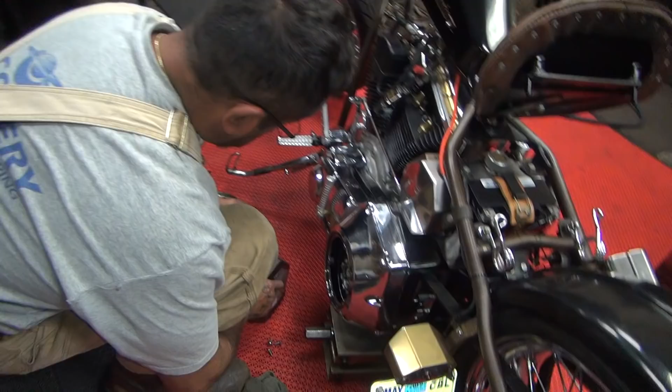Now we're getting some Sportster transmission oil. This is Sportster primary oil, same container, different label. I got an extra quart of that, so we'll get rid of that first. Need to lean the bike over a little bit, or are you good?

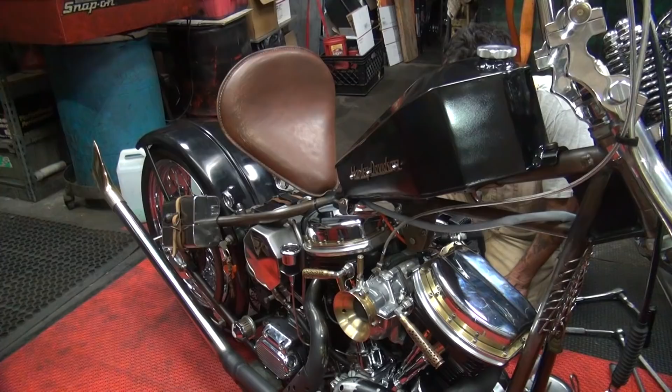Yeah, I had to put that turret tailstock on my dad's old lathe, man. That thing works great. Center drill. You didn't have a tailstock on your lathe? What good is a lathe without a tailstock? Oh, with a turret though, on the back of it. Yeah, I had a turret tailstock, it was all rusted. That's pretty fancy, saved a lot of time. That's fancy having a turret on the back of your lathe. Hey man, it's a good lathe. Thank God my dad took care of it. It made my life a lot easier right now.

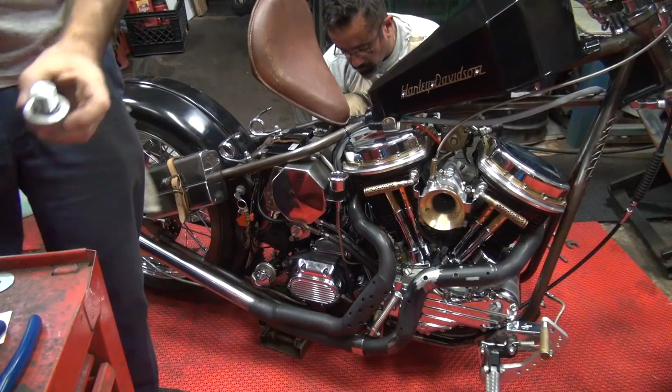So what's going on? Oil lines are probably correct. So I assume the outside oil line here is your feed line? Yes, that steel is the breather, inner one is the return. So you return it into the bottom of the tank? Nope, it's got a hard line that comes all the way over here and drops. If you remember when I made that, I asked you how to make it. Well, I thought we made sure it was correct. Just double check, it looks like it, but it's not. There's a line that goes up and drops back over here. So, oil leakage around your feed line around here, but that's probably just residue. Okay, yeah, it looks like everything's correct, if I can tell.

Should go out pretty quickly. How much have you spun the motor over so far? I probably turned it on for 4 seconds. Okay, well it takes a little bit longer than 4 seconds most of the time. If you pre-lube it, pre-prime it, it goes a little quicker, but that's about it. So we got an oil gauge right here, and we got an idiot light right here. Either one of those two should go out. Okay, we're in neutral? Spark plugs out.

We are in neutral? Yes. Spark plugs are laying against the ground where you can see them? They're up on the top motor mount, yes sir. Okay, give me about a 5 or 10 second blast and see what we get, make sure the spark plugs are working.

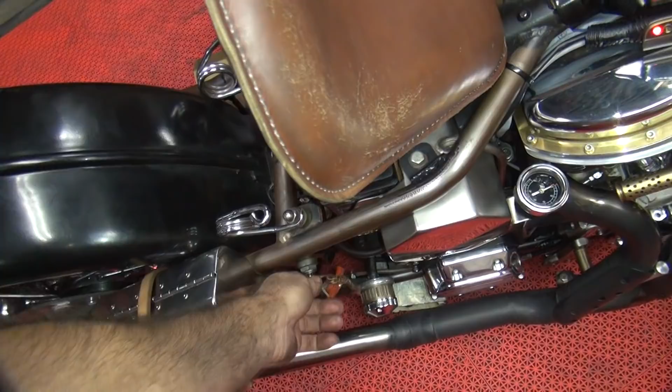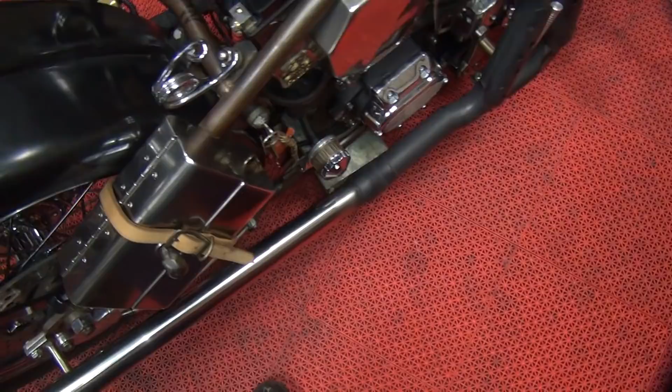Your relay is not working. Did we hook the wire onto the starter? No, we didn't, it won't work without that. Spade terminal, dumbass. Well, he's a dumbass to put the starter in there.

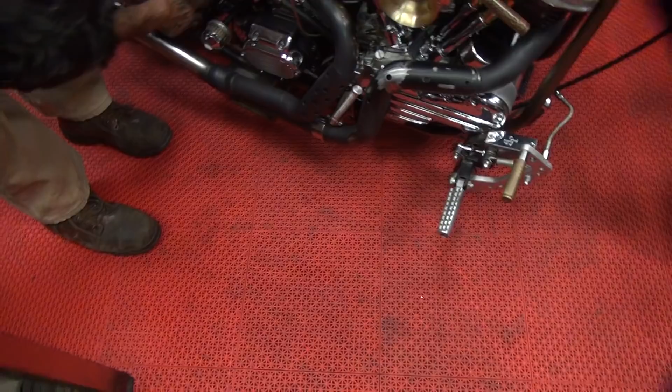There, we got it worked in now. Might work now? That's what they say. Well, it's hard to get good help, you know.

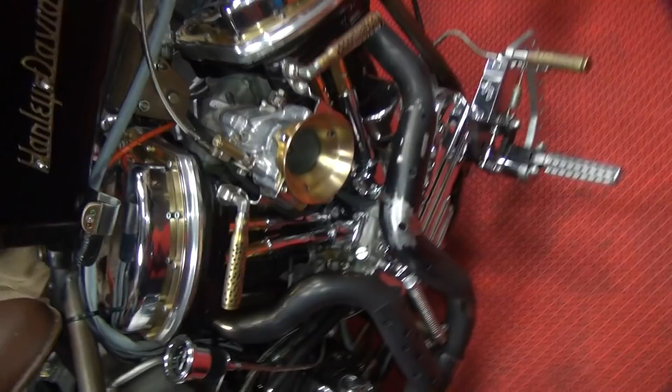I checked the gas, the carburetor, it's not flowing, it was stuck. It's stuck, it's not pouring the gas out. I don't know where the overflow's at. It's back here. It's not coming out yet. But, oh, you're all right. Gas is off, isn't it? Leave the gas off, I don't want any gas off in the carburetor.

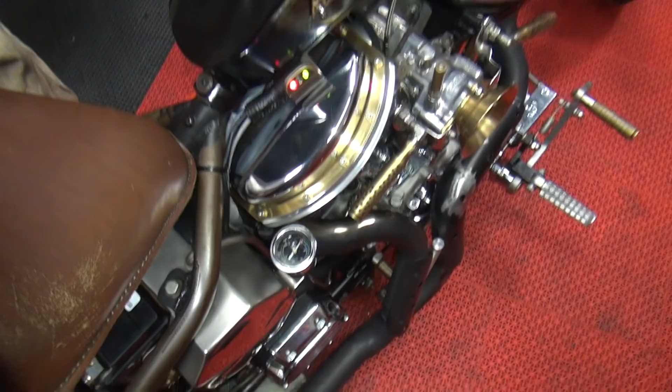Okay, so we're gonna see if we got any oil pressure. You go check the ignition to see if it has any ignition. Ready? Yeah. Still not working. At least the starter's working now. Trying to start, let me get my jumper.

Okay, we're gonna bypass the... you're reading from the positive to the starter, right? I'm just gonna... flashlight's up over there.

It's insulated, so I can't use that.

What was that? Where'd that spark come from? Okay, we got it dead. That's sucking a hell of a lot of juice and not doing anything.

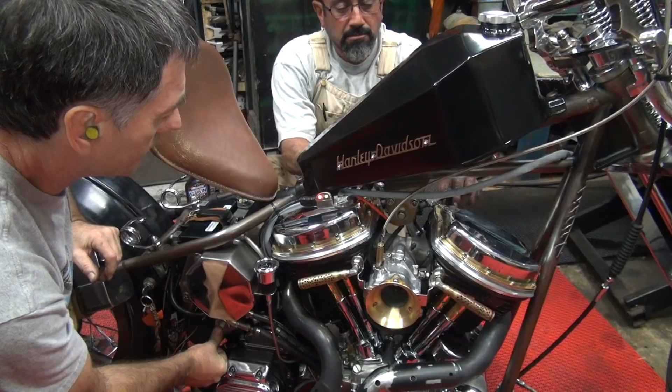Yeah, you got a spark. I can see one sparking. Is there a good spark? See the rear one? I see something flash over here. Can you tell if it's pulsing back and forth? Yeah, they are. They're pulsing. But we have no oil pressure.

Nothing. Alright. We need oil pressure, we don't have it.

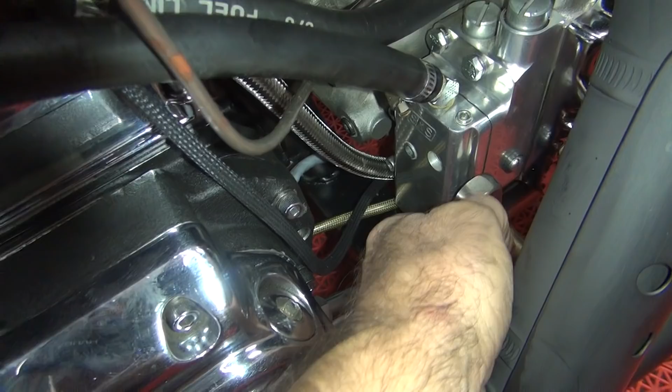See this oil line right here, there's a gallery that goes all the way from top to bottom on S&S, I think. So it's just going. This is on the same feed, feed and return on the same thing. It should still get oil pressure, just it would build up in the motor, it wouldn't pump back. Because that should be over here.

No, hold it, where's your feed at? Yeah, your feed's coming on top. You should still have oil pressure even if it was hooked up wrong.

So I'm not sure, I have to look in the S&S book to see how this is supposed to be. I think it's supposed to be over here. Is there another fitting next to this one on this side? There's a plug for another. That's where it was before. Yeah, it should be over here. You're on the feed, this is return. So you got return in the feed. So that bottom fitting needs to go over.

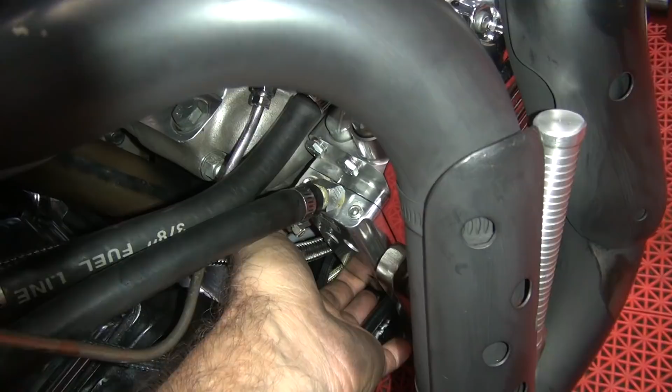It's leaking too, a little bit. So you need to reverse that.

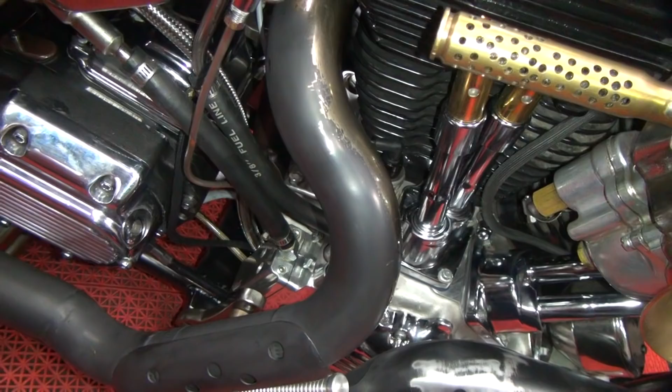Alright, but I don't know why you don't have oil pressure right now, because you should have a lot of, the oil should be going right into the motor and have pressure. It just won't pump back. You should still have oil pressure. You'd have wet sump real bad, but you would have oil pressure.

Now, how much has this oil tank gone down, you think, from where you've had it? It's pretty far down, yeah, it went down quite a bit. It went down a lot. Well, if it's gone down, that means there's oil going in the motor. It should have oil pressure. I don't understand why there's no oil pressure.

Did the dummy light ever turn off? No. What's the tank at right now? It's about 1.25 inches down at least before. How far is it down now? It's probably a third of a tank down. Is it down to half a tank yet or not? Shit, it's down a couple inches now. Yeah, it was down pretty deep before.

So it acts like you got volume going through it, but it's not building pressure because it's venting right out the tank. It's not a closed system right now. It's open. I mean, but it should still build up pressure.

I think it would still build pressure because you're still going to the feed gallery. The pressure's on the other side of the pump gear, so you're just double feeding it basically, but you're not double feeding it because there's no oil to the other line. You know, because the tank's low, it blows up top of the tank. It should still be making oil pressure, still. It would wet sump, run the tank dry, but it would still make oil pressure.

Changing that feed, that means you got to pull the exhaust off, I assume? No, I could probably get to it if I had a stubby. Yeah, it's going to be a pain in the ass doing. You should do it on your lift at home, be easier, but otherwise we're going to have to lean the bike over a little bit.

How strong are these bars? Can we lean them against the rack at about a 45-degree angle to get access to the motor, or? No, I ain't gonna do that. I could get to it. You got a little short Allen wrench? You have to make one. Just make one, cut it, whatever it takes.

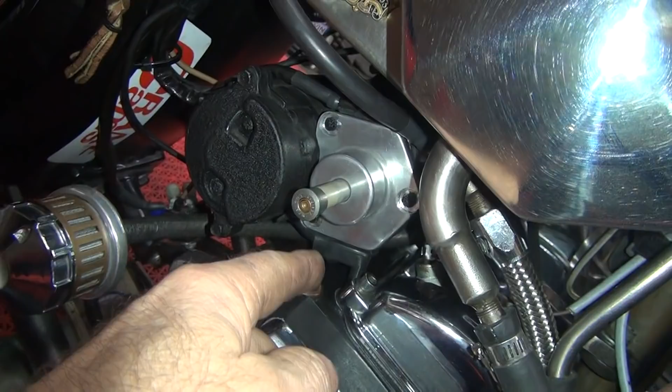Where's your wire going on that? The big cable, it's down. Can't see, yours is going to the bottom? It's not to the top? No, it's on the top, positive, yes that's what I mean. It's up, this is side post. Side goes forward, back, and the top goes back.

You have a side post starter. Now, you got room to do the top? You probably have room to go the other way, maybe. I don't know, it'll be real close to your oil tank up there. Why would that do that right now? Well, I think it's something inside the solenoid doing it. I don't know, there's something that's causing a hell of a load.

Usually when you take stuff apart, you see problems. You can guess all day, but take it apart and look for something. Okay, I'm gonna go look at the instructions on the oil pump routing. I'll go grab my old instruction paper. And either way, you got to pull that line up, I'm pretty sure. So we'll be back.

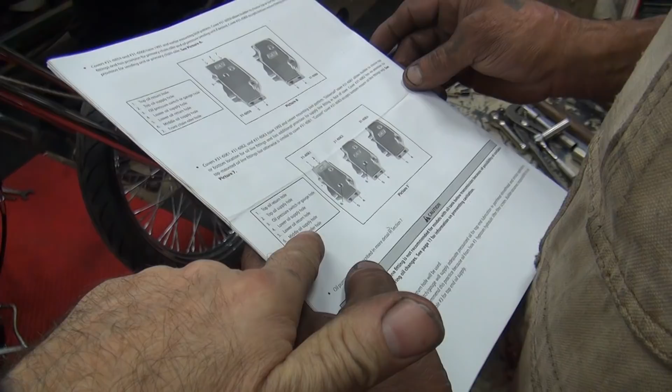What are you looking at? Is this which oil pump? That's for an idiot light. Middle oil supply hole. Oh, that's for like an FXR where they come in through the top, through this, at an angle, 45 degree. So which is my oil pump I'm looking at? It doesn't matter, the covers are all the same.

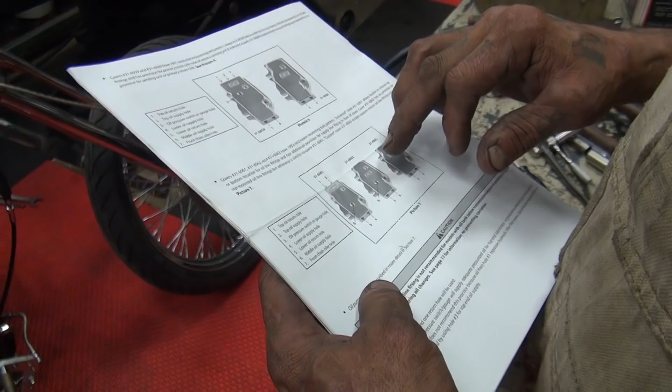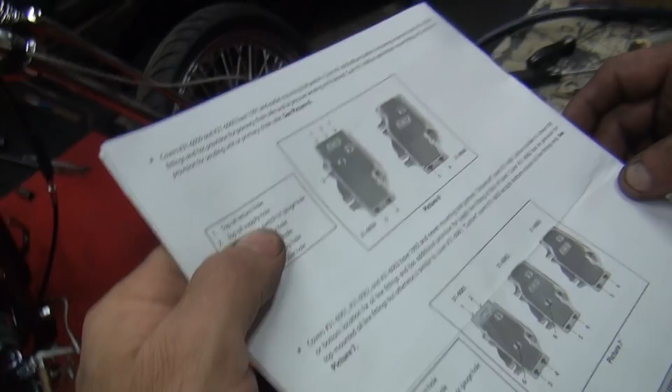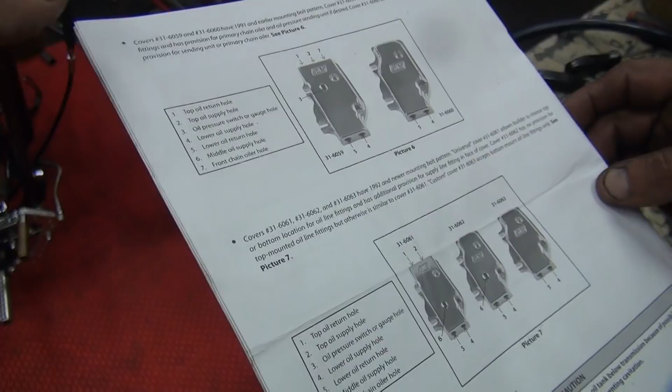You got oil 2 as your return, oil returns where you're coming in at, and 2 is top oil supply hole. 1, which is right next to it, is oil return. So you're on the wrong one. And on the bottom, same thing, you got 4 and 5. 4 is your lower one, which is where you're at, and 5 is the middle one, which is coming out the bottom here, or 5 is lower, I mean. Lower, see, lower oil return hole.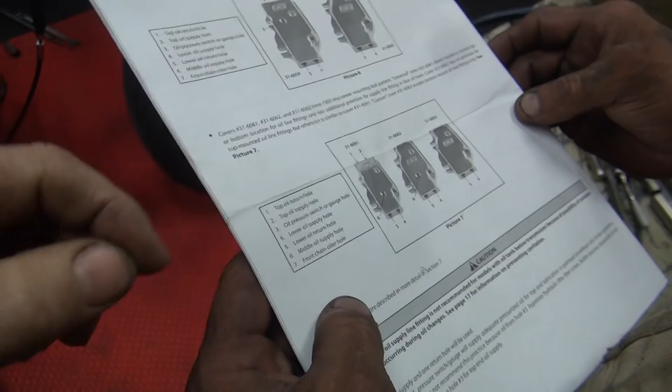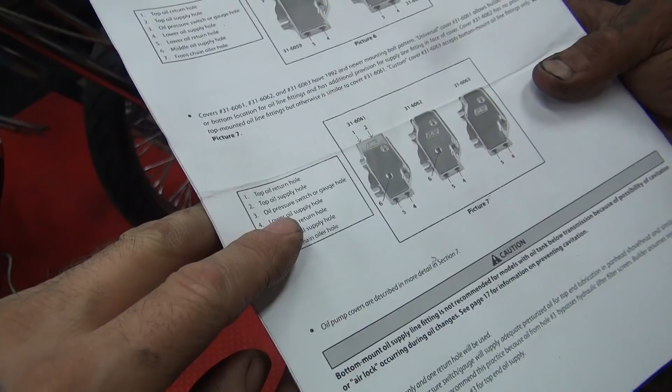And these ones over here are the same way. See, you got 5, 5 is always low return hole. You're in 4, which is lower oil supply hole. So you have your oil return and your oil supply on the same gallery. There's a line that goes all the way through a hole, and it picks up this hole, and that hole, straight down. This one here, same thing, it goes straight through. It misses this, but it goes straight through.

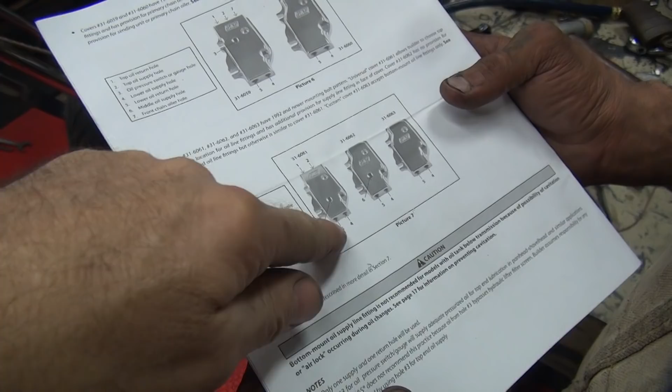So those are the different ones they've made over the years, but they all do the same thing. You need to take your return line, which you got in 4, and put it on 5. Okay, and that's how it was before. It's pretty obvious, you can see how it's supposed to be. These two are that way, these two are that way. So, pretty straightforward.

I'm going to go do some welding on my bike, get some work done on my stuff. Alright, that's it for now on this one.

Alright, Gina's got the line all swapped out under here. Now you're in the correct fitting location, hopefully. Yep, and the inside hole now. So that should work now.

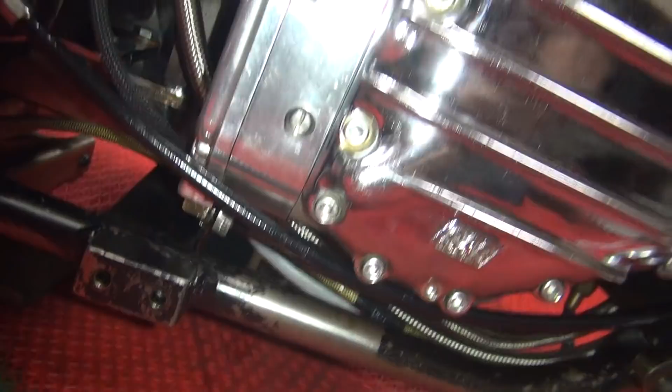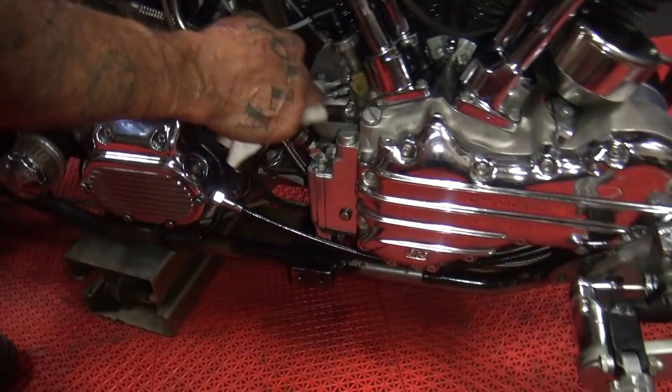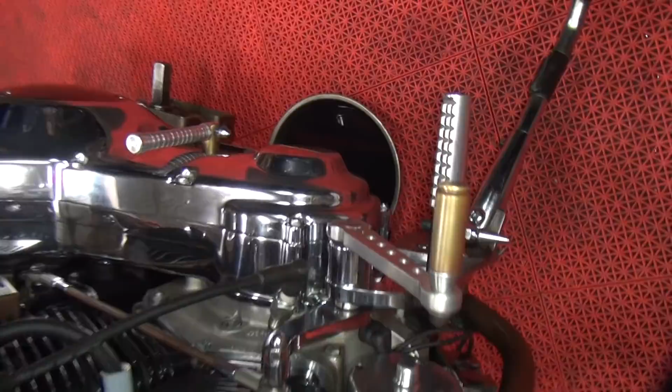Yeah, but you had a lot of oil come out of the motor, so how much came out? A pint? At least a cup, a quart? At least 8 ounces, maybe more than that. Where'd the pan go? Oh, there's the pan over there. Oh yeah, that's quite a bit. It's half full, a good pint in there.

I think you got oil pressure, just a matter of if it's going to show it now or not. Give it a crank, see what you get.

Now it's working. What the fuck? Now the ignition worked. Oh, you hit this, you got the starter to work. It because the oil lines weren't right and it's just not... decided to work today. We ran it enough times it decided to work.

The oil pressure didn't move, did it? Nope. Yeah, I think it did. The dummy lights are on.

The oil's way down now. We need oil, there's no oil. There's oil in it, you got to pour some oil back in the tank.

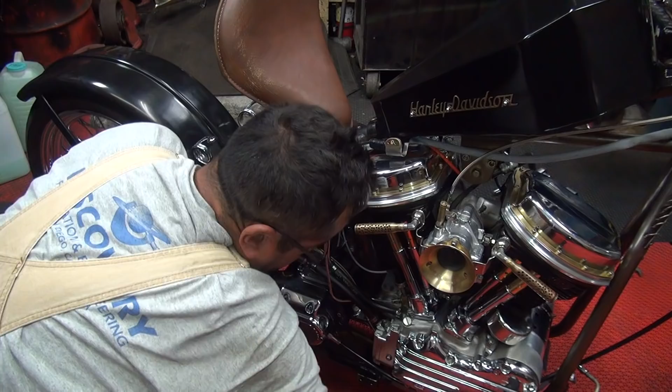Okay, let's see if we can get that check valve out of there. That could be stuck from sitting. I don't know what it is.

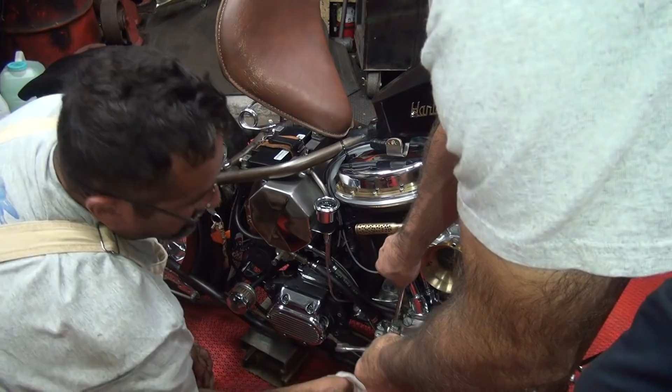Now it's starting, what the fuck man? Come on man, let's see if we can get this thing to go down. Just put a little pressure on the floor. Let me get down on this. Okay, that's too big. Up here. Press up here. Oh, up here. Alright, pull it out.

Where's the pan at? Bring it back under there. It's starting to leak again.

Where's my clean rag? I'll get you some rags. I'll bring you some damn rags. Don't worry about your rags, I got a bunch of rags.

Okay, where's the thing at? Can you look, is there supposed to be a ball in there? Nope, it's on the other side.

Yeah, it's coming up, put it back in. Put it back in, see how the oil came up? Yeah. It's gravity, it's just gravity from the tank feeding up, and it goes right through the gear set and comes up to the valve. So that valve goes right to the oil pump gear.

Okay, tighten up a little bit. That's good, that's good, so that primed it. It's definitely got oil in it now. If the switch don't go out, there's some kind of a gallery that's open.

So try it again, let's see what we get this time. It's oil in there, so I don't know what the deal is.

Okay, let's go ahead and put everything in there, start to pick it up. It's got oil in it.

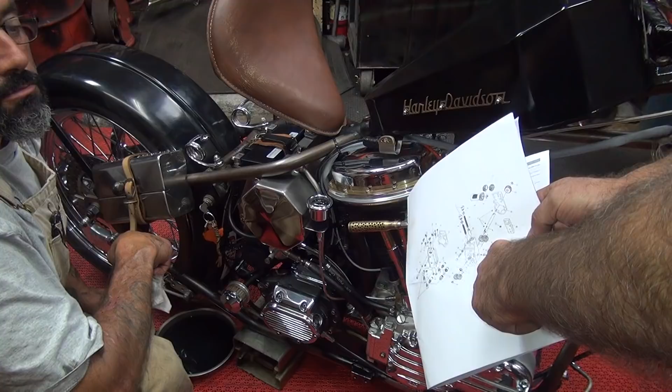See, here's a tapered set screw, which you don't have - adjuster screw. It should just be a straight cap, a standard screw with a washer to seal it. Because this adjusts the feed that goes up to the primary, which we're not using. It's capped off, so it doesn't matter if there's adjusters in there or not. So once you pull that screw out here, see what's underneath that screw head.

Should I use this one? Put the pan back under there. I'm looking to see if it has the tapered screw or just - it should just be a short, stubby screw. It's got that tapered one in there, which is going to have a tapered screw. That's why it's so long.

See, the other screw came in the kit. Yeah, they just didn't use the right screw, they didn't cap it. All right, let me go find these cap screws. Is there any oil coming out of there? Nope, should be. Goes in the pressure cavity. Yeah, it's coming out slowly.

So this needle, it's like an adjustment to get oil up to what? Yeah, but you're not using that. But what did you say, what's that one for? For your primary oil - it goes to the primary feed to lubricate the chain you don't have over there. You have a sealed system over there.

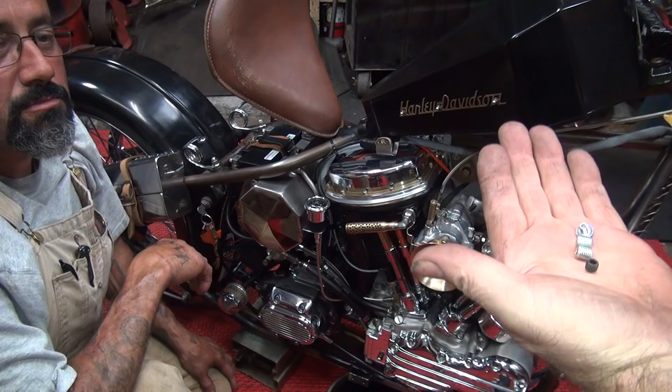These are your normal plugs. These little plastic, paper containers like this have the stuff. There you go. There's your screw - now is there a little copper washer underneath that one? Yeah, perfect, steal the copper washer off of that. Oh, there's a copper washer right there. There you go, just screw in the other screw.

You're not using this piece of crap. There you go - if it leaks a little bit, put a little sealer on it next time. The little washer should seal it, but that's why you don't get rid of this crap.

You know, some dumbass needs tools. What's that? You never know when some dumbass needs some stupid screw. How come all my stuff's full of oil? You're lubricating my tools. Yeah.

What the hell is this thing? Did you grab that out of something? That was my cheater part for that Allen wrench. Goes over there. All right, I'm gonna put the exhaust on.

Start up with exhaust or without, your choice. I don't care, I'm sorry. Should we put some more oil in this thing? You got oil right in the pan, why don't you put it back in, dump that tank? I would, clean funnel? Aren't you cheap like me? Yeah. You got a clean funnel. Well, now you're asking for a lot now.

Just went and buy all the funnels. Funnels are over here, right there on the second shelf. Right there, you got that shelf, top shelf, whatever funnel you want. There's some up there on the next shelf too. Not all the way up - second shelf, third shelf, right there. Nothing there? You see it?